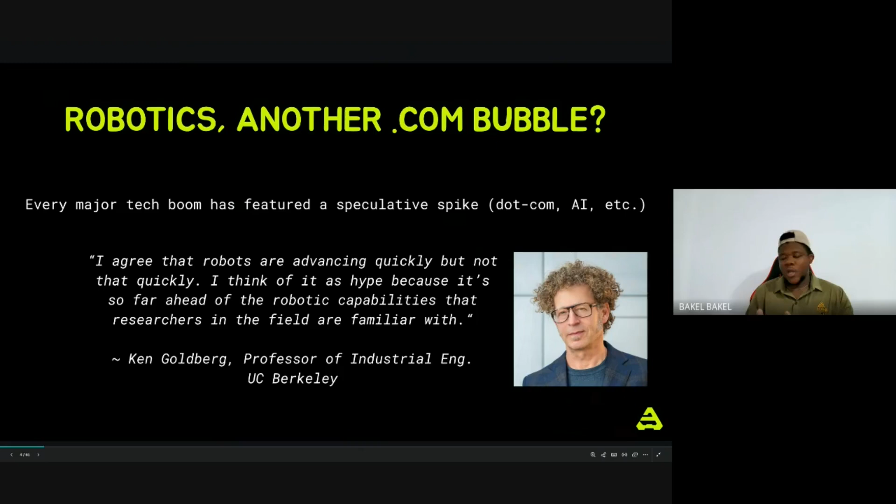If truly this is a dot-com bubble, and why we feel it is not, or it is. Now, the first thing we need to see is I've put together some reputable sources. This is a professor from UC Berkeley, and he is saying that he feels robotics is advancing, but not as quickly as people think it is advancing. So it's more like a hype, right? People are projecting a reality that doesn't exist in a field that hasn't gotten that far. Now, whether he is correct or not is something we are going to find out at the end of this lesson. So just try and follow the whole train of thought.

Now, before we start analyzing if robotics is or is not a dot-com bubble, let's first of all understand what robotics is. This is going to take a good amount of time, because you cannot really judge or say something about a particular field if you do not understand what that field is.

Now, there are some bodies that govern robotics. When I say govern, these are like supreme bodies, you can reference them, you can talk about them. If they do say something, there's some form of authority, both academic and industrial. One of those bodies is the IEEE Robotics and Automation Society. We all know IEEE, it's the international body for electrical and electronics engineering, and robotics sort of falls under that, so that's why we have a society for robotics in IEEE.

They said robotics is the science and technology of design, manufacture, and applications of robots. That definition is very simple, but sort of vague if you ask me, because then it begs the question, what is a robot? It's just like saying cooking is the act of cooking, or the act of being a cook. You still have a term that you have to define. Now, there's also an adapted definition of robotics, where it says it's an interdisciplinary branch, because it combines mechanical, electrical, computer science, and a whole other branches. We'll also look at that. At the end of the day, it's aimed for design, construction, operation, and use of robots. So again, we are falling back to the word robots.

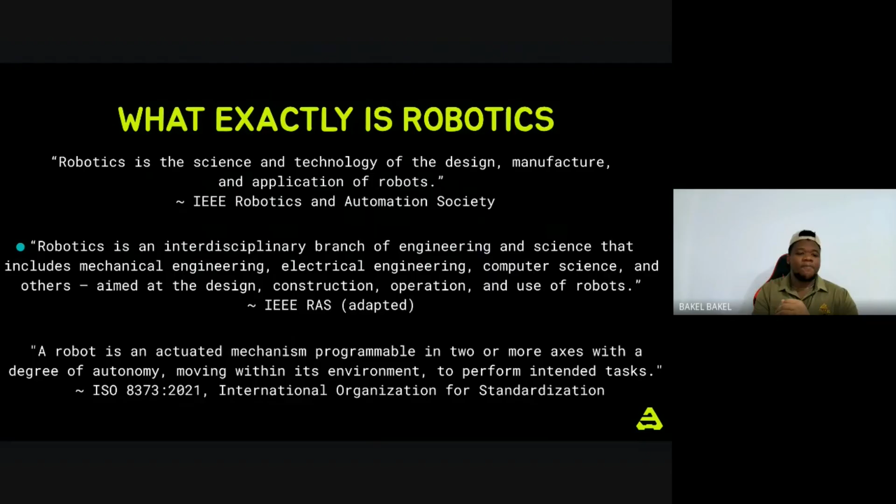Okay, so now let's kind of go away from technicalities and relate it to real life, right? So if you are doing robotics, basically you are building a system that should be able to sense the world. It should be able to make a decision, it should be able to now act physically because of that decision, and then work under uncertainty.

I'll give you an example with autonomous vehicles like Tesla, Waymo. At least people know there are cars that drive themselves, self-driving cars. So let's say a self-driving car is moving on a road, and it has gotten to a point where it needs to take left or right. The road is a T-junction, it terminates, there's left and there's right. And on the right, there's a barricade, so it cannot pass there. But the map, Google Map, might not see that barricade, right? So it says there's a road there.

Now, a robot is not just following an inbuilt map when it moves autonomously. It senses the world. So you, as a human being, you can see that barricade. The robot can also see it. The robot doesn't have eyes, but there are sensors that we use for that. I'm not going to go deep into that because that's another topic on its own. But on the surface, it can see that barricade.

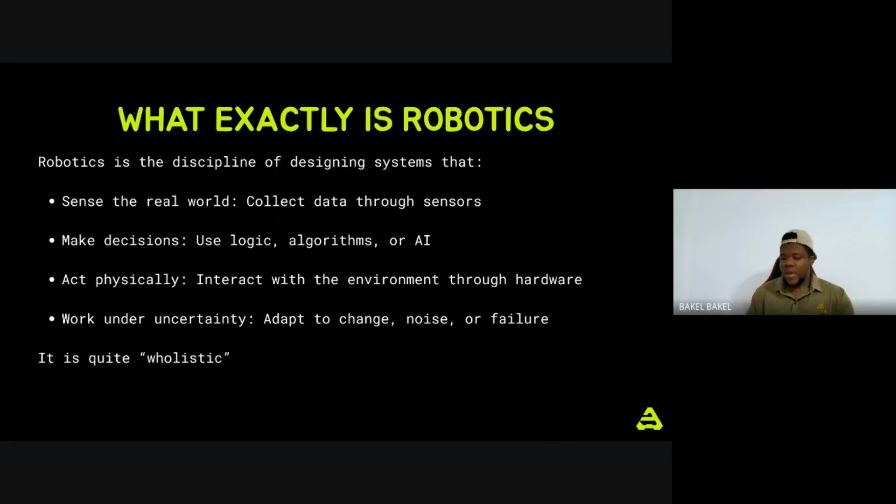But at least understand the idea of a robot using an autonomous vehicle because that's the most popular form of robots. Now that's what a robot is. And robotics is the act of building all of those things, bringing it all together and making it function as one. So it's a holistic field.

So there is another video where I actually talked about what a robot is, what makes up a robot in great detail. And the link, I'll also provide on this slide so you can go through it. This was... okay, so I was talking about what makes up a robot. And I was saying there is a dedicated video, a dedicated class that we had especially for this particular topic. So we're just going to run over it because it's a really, really lengthy topic.

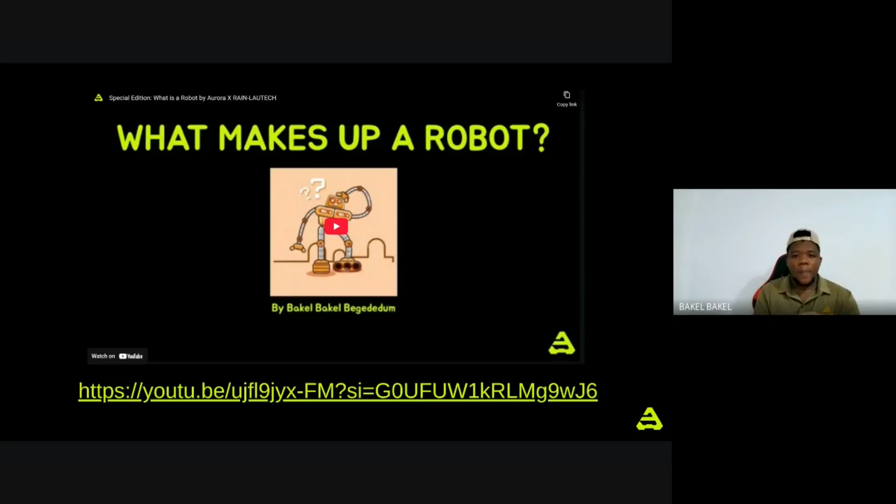So basically, a robot is made up of roughly 7 general parts, right? It's general because not all robots have these, but most of them, you can see on the screen. So we talk of the structure, we talk of actuators, we talk of sensors, control systems, power source, end effectors, and communication.

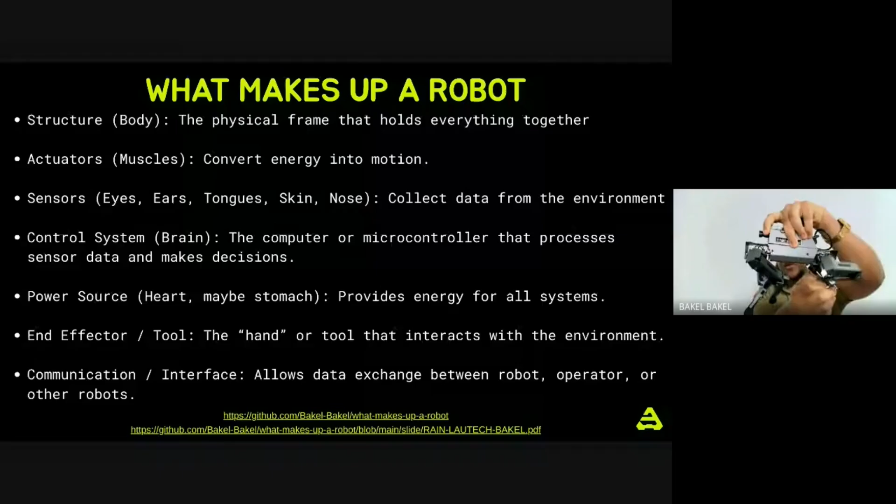So the structure basically is the overall body of the robot. Just for illustration, I will also bring something like this. If you see something like this, you can tell from the structure that, okay, this looks like a dog basically. So you can tell from the structure that this should be something like a robot dog. And in contrast to something like this, where you can easily tell that, okay, this is an autonomous vehicle or a robot car. So that's just the structure.

It's the body. Now, actuators is the muscle. It's how they move. And they all have different ways of moving. For a car, if it's an electric car, you'll be thinking of motors, or maybe mechanical, it's the engine. But if you are talking of, say, a quadruped, then it's those 4 legs. But those 4 legs are usually controlled by 12 motors, thereabouts. But at least you know what the actuators should be like.

And then sensors. Remember when I said the autonomous vehicle can see the barricade in my earlier example? Yes, it can see the barricade using sensors. It doesn't have an eye, but then there are things like LiDAR, there are things like cameras, there are depth sensors. These are different ways it can sense the environment.

Then control system is the brain. When we said, okay, after sensing, it needs to make a decision, this is where it actually makes that decision in the brain. It could be a microcontroller, it could be a microprocessor. Those details are things that we can keep for now.

Now, the power source - there are some robots that run directly on electricity, you just plug them in, and then some do have batteries. In any case, there must be something to power these components. That's why it's the power source.

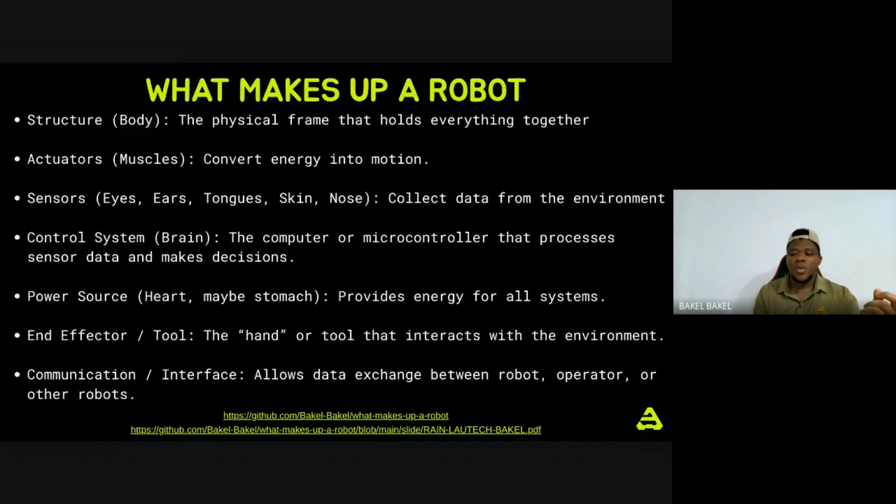We're going to look at the branches of robotics. Now, this can also be said as applications, but it's a very long list, and the list only keeps getting longer because people are finding new applications for robotics.

We have industrial. Industrial is one of the earliest, and till now, it's one of the greatest applications for robotics, where we're talking about car assembly. You see robots doing car assembly and general manufacturing jobs. We also have service robotics, like Roomba, vacuums that clean themselves in the house. You just turn it on and it cleans your whole house for you.

Those are service robotics. There's medical logistics, space robotics. We talk of the Mars rover, one of the earliest space robots known to man. We have defense and security.

Ahmed, please can you mute your speaker? Your mic rather. 5:35. Yeah, okay, I can do it myself actually. Okay.

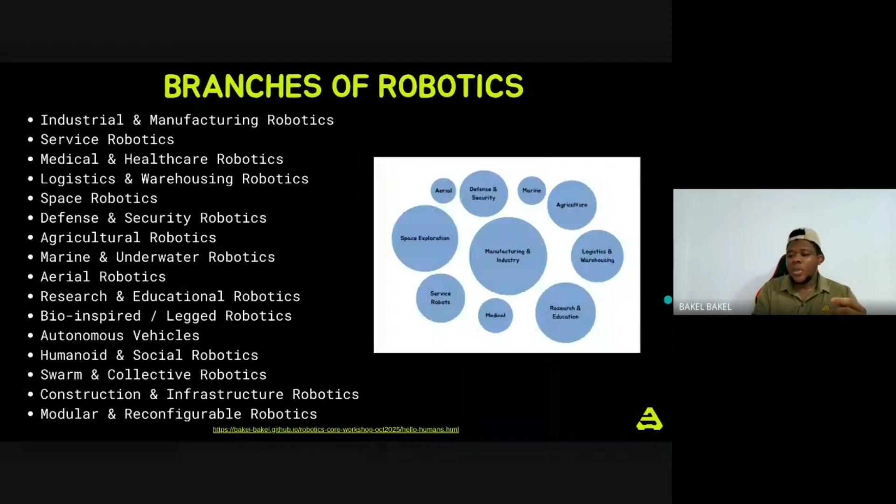Okay, so these are the fields that make up robotics. Remember when we defined robotics, I said it's an interdisciplinary course, right? So one day you might be solving some complex form of mathematics, another day you are doing control engineering for a PID, another day you are thinking of integrating artificial intelligence, and somewhere, somehow, you're also working on the mechatronics part of robotics. So all these particular fields make up robotics.

It's not as if you must know every one of them. We more like pick a thing or two from every single field, and then we squash it up together and make it robotics. So that's how it is. And there are some times where you might not even touch a field at all, depending on what branch of robotics you are working on. It's actually like that.

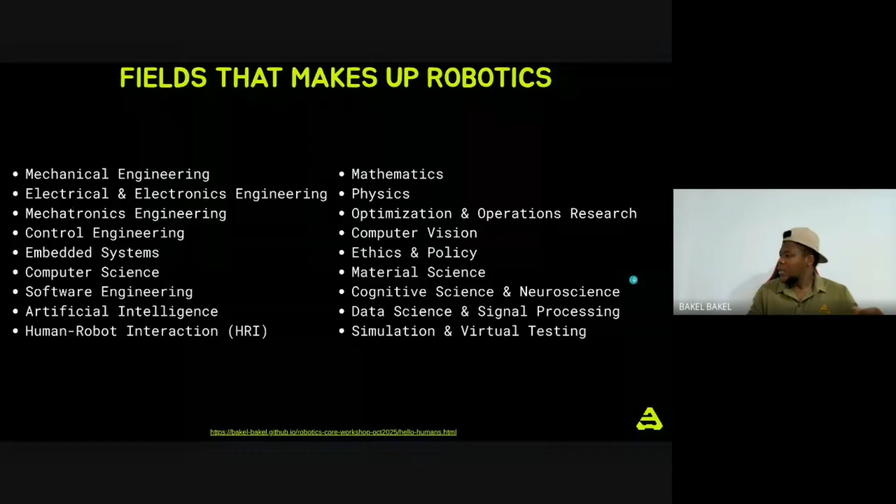Now we have fields that look like robotics. That's one of the things I wanted to clarify far more than the branches of robotics or whatever. Fields that look like robotics: automation, embedded systems, mechatronics, AI. It's a very strong confusion, and I want to clarify that with personal experiences too.

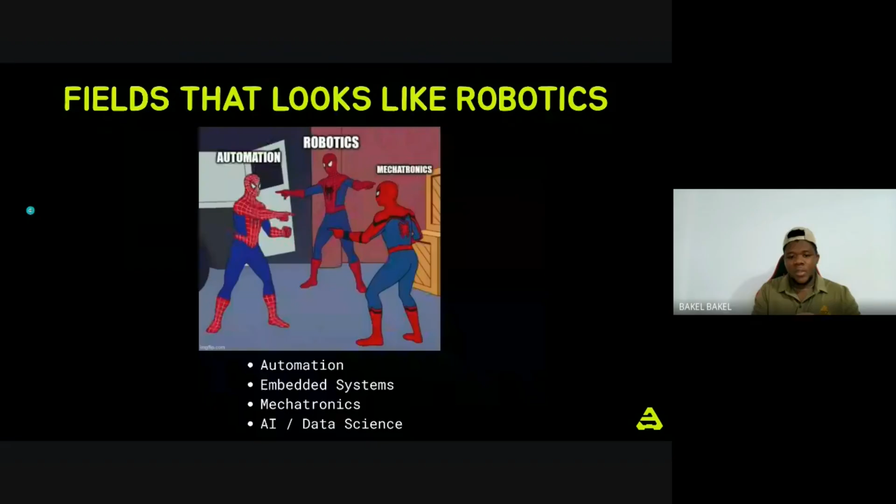The first one we'll look at is mechatronics. While some people believe mechatronics is a part of robotics, it's actually the other way around. So let me come again, just talking about fields that look like robotics.

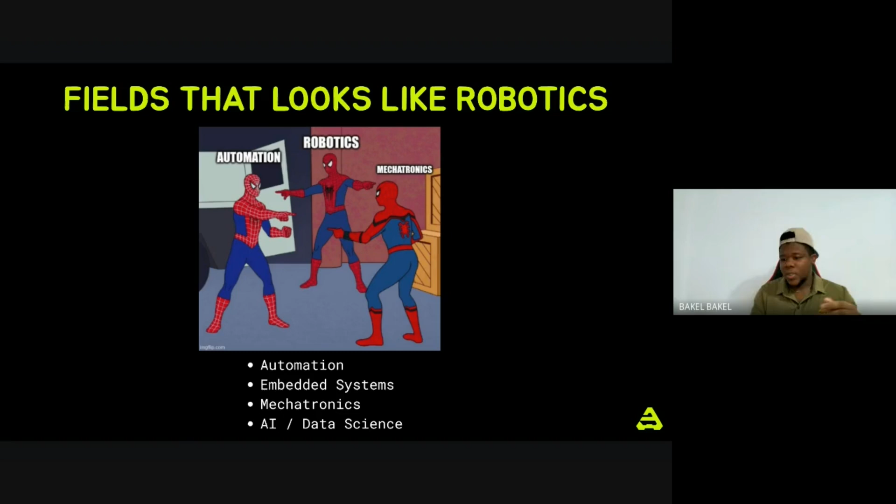These are some fields that a lot of people confuse with robotics: automation, embedded systems, mechatronics. Mechatronics is the father, basically. There are people who say robotics is... look, when a field is being hyped, a lot of uneducated people talk about it and it becomes irritating. It's just like AI people - we see a lot of people hyping AI, but only a very few know what AI is, what its capacity and capabilities are. You don't put mechatronics inside robotics; robotics is actually inside mechatronics. Mechatronics is a broader field that combines mechanical, electronics, computer science, and control to create intelligent systems.

But what is the difference between mechatronics and robotics? In mechatronics, your systems don't have to actuate - it's not necessary. For robotics, all robotic systems are mechatronic systems, but not all mechatronic systems are robotic systems. So there's a very clear distinction there. I took mechatronics courses, and some of them had nothing to do with robotics. Now that I work in the field, I can say yes, there is actually a clear distinction between these two things.

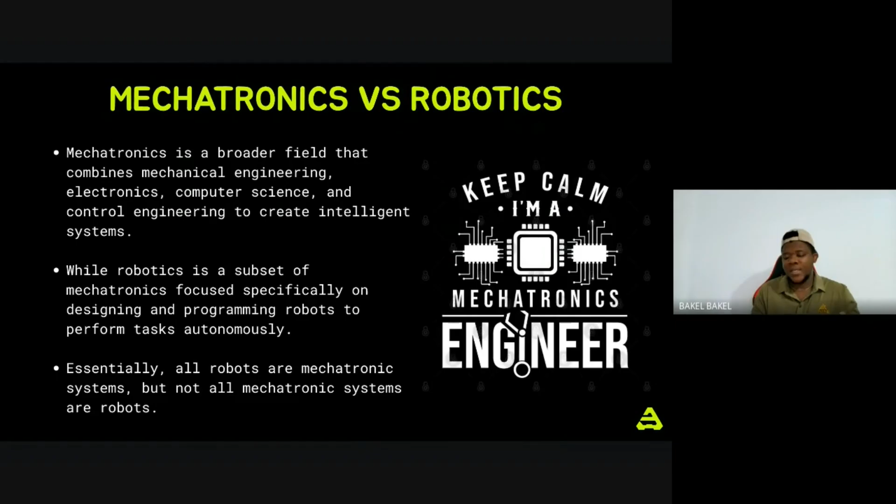Now we look at AI and robotics. First, it's obvious that the majority of AI resides in software. What I mean is that AI per se is a computer science endeavor bent on learning data, recognizing patterns, and making decisions all within software. None of this has to do with sensing the environment or actuating - it's basically the part that does the thinking, if you look at it critically. So will I say robotics is inside AI, or AI inside robotics? No, these are completely different sets of knowledge that simply intersect.

So it's more like AI union robotics, something like that. Not all robotic systems must have AI in them, but robotic systems that do have AI make very smart decisions, and it helps with perception and planning. I could go into more complicated things, but let's understand the basics, the idea.

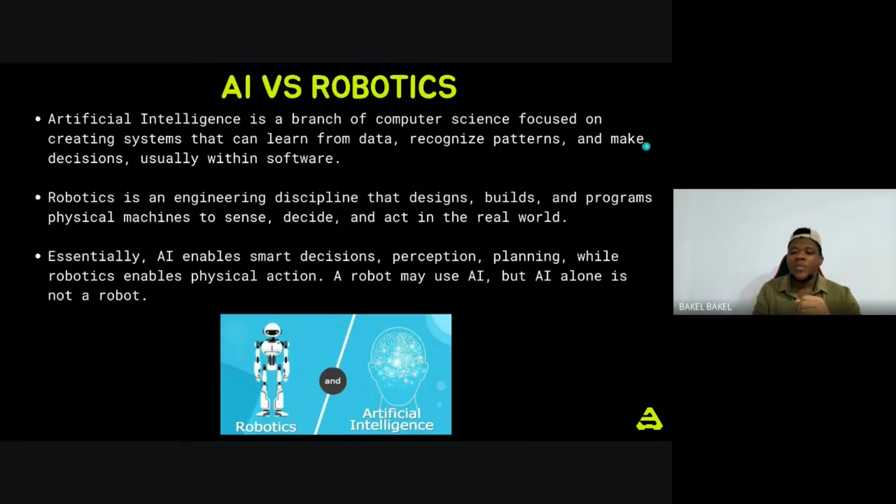Now we look at automation. Automation is another thing that confuses people with robotics. Why? Because if you look at it from the outside, automation looks like robotics. Take for example a factory line - you have robots there, and what they are doing is assembling a car. Let's create this little situation.

The car door comes in, and say the height of the door is 3 meters, and there's a weld that should be at the top at 3 meters. One machine welds at 3 meters, then moves to the next one. Let's use that example. In automation, they've defined these rules: once the car door comes, go straight up to 3 meters and weld.

What happens if you bring a car door of 1 meter? It's still going to go up to 3 meters where there is no car door and attempt to weld the air. The problem is it's not sensing its environment, but it's extremely precise with the instructions given. So it looks as if it's a robot, but all this is just automation. The environments they put automated bodies in are so controlled that they have to perform properly.

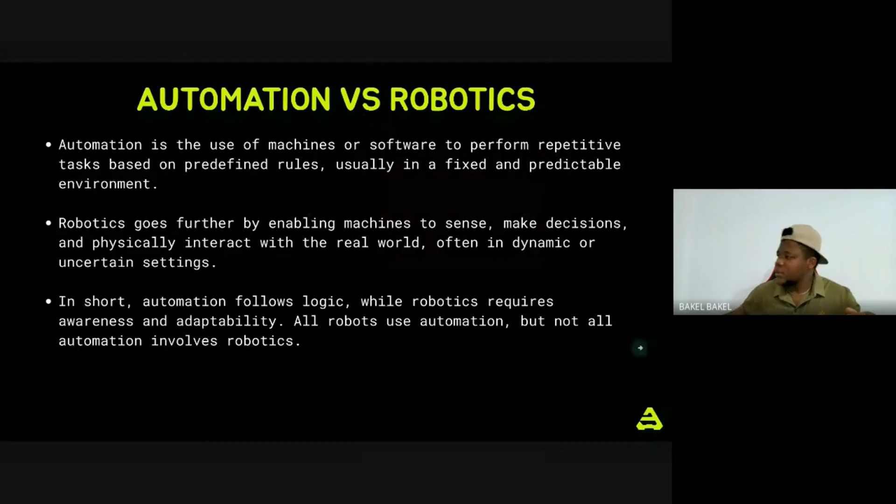And for embedded systems, robotics will not exist without embedded systems. That's one. And yes, the class is recorded. I'm going to share a very funny story.

Now, I was in Netherlands, right? I traveled to Netherlands. I went for this professional training, and I was narrating my embedded system story. So prior to that program, prior to that certificate, prior to that training, on my CV, I had a place robotics engineer, and then I have another place I wrote embedded.

So I've always thought, okay, yeah, I'm robotics and I'm embedded. Why? Because I know how to use microcontrollers, I know how to use microprocessors, I know how to use a lot of tools. So somewhere in my head, I'm thinking, okay, yeah, that's enough to be an embedded system engineer. So I have robotics and embedded system engineer on my CV.

So I actually go to this place, these competition events in Netherlands. There were guys that were doing robotics and there were guys that were doing embedded systems. And I went to the embedded system guys and we started talking. And when we started talking, I started hearing things I've never heard before in my life.

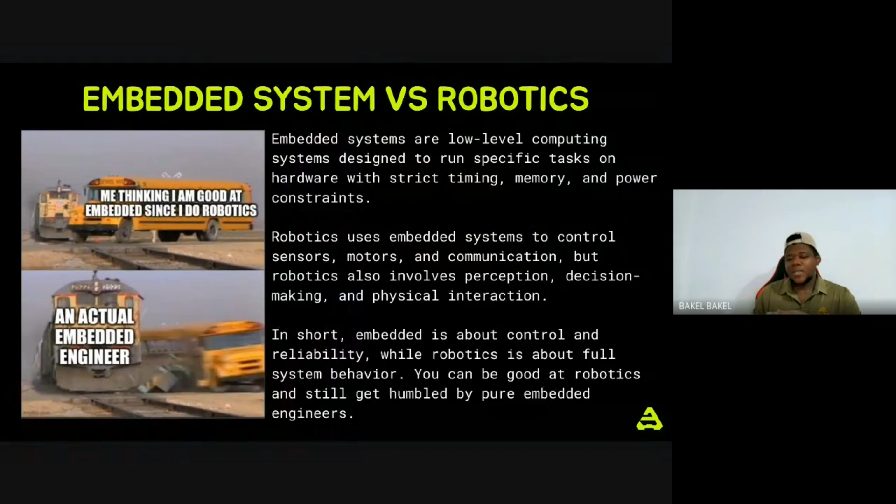Now let's look at robotics from my point of view. And when I mean my point of view, I want to make it a bit personal. My journey in robotics is a bit strange. Some people think it's impossible, but then again, I share it, and it's on my LinkedIn, if you've followed me for a very long time now.

I started as a naval architect, and that's where my major training and my experience is, right? Oh, you're just joining, okay, congrats. So my undergraduate was in naval architecture, my two masters were naval architecture. So basically that's what I have been doing.

But then I switched to robotics in November 2024. And the way that happened was a bit funny, because I've always known about robotics, but I had never really done anything about it. But then there was an elective course in my master's, my second master's in naval architecture, where robotics was an option. So I was like, okay, let me just try it. And I ended up turning that elective course into a career, because it was not enough to make a career though, but you research and add other things to it.

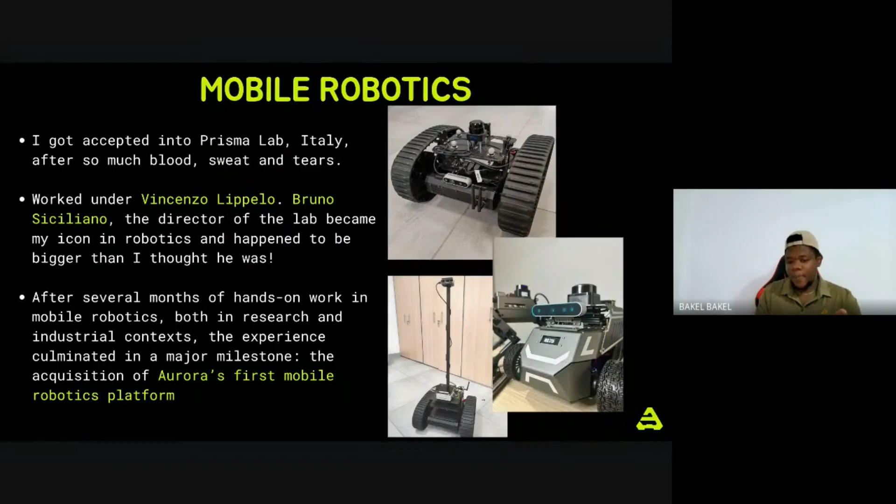Again, let's follow the story. Now I started doing underwater robotics. What happened was in Italy, I worked there for like 3 months, and then I moved to Spain.

And while I was in Spain, anywhere I get to, I look for the closest robotics association or the closest robotic gathering. The one in Spain was underwater robotics, not mobile robotics like I knew in Italy. So again, I had to start learning things again. I was like, it's robotics, robotics is robotics, so anything robotics - that's basically what I came up with.

And then I played around with underwater robotics for 5 months. At this time in Spain, I was still doing my master's in naval architecture.

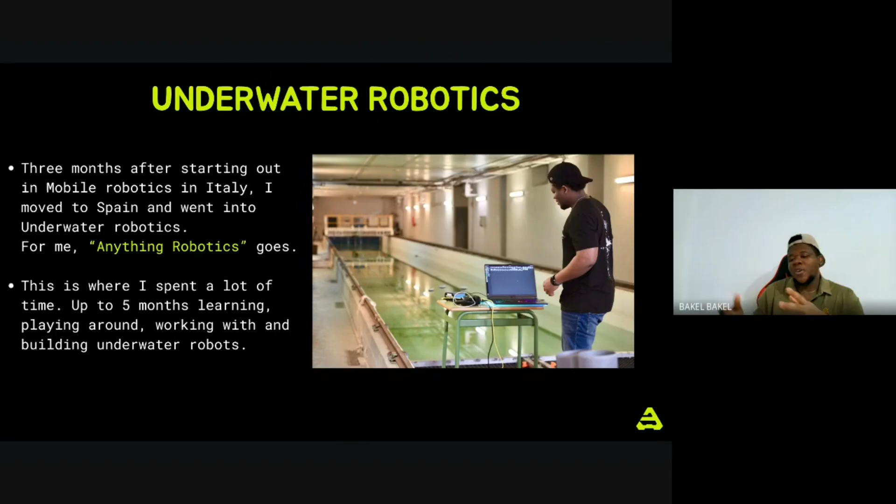But the professors in Spain were like, okay, this kid is actually good. So they started inviting me to come and lecture other master's students in robotics. Then people mistook me for a postdoc in robotics because I was always in the robotics lab and always working. But I was just there for fun. So this is me at this point.

They were inviting me for trainings, and I started training a lot of people. I wasn't being paid for it actually because I'm just doing it for fun. So that's how it all started.

And then I got some PhD offers, when you're putting yourself out there and just exposing yourself. So I started doing competitive robotics.

But tomorrow we are going to talk more about competitive robotics because we have a guest speaker, Saka, who actually does competitive robotics a lot.

But from my own end, I went for this European Institute of Technology competition where my team actually won. It was actually one of the biggest points in my career, because it was a flex - we got teams from the US and everything. So it was a big flex.

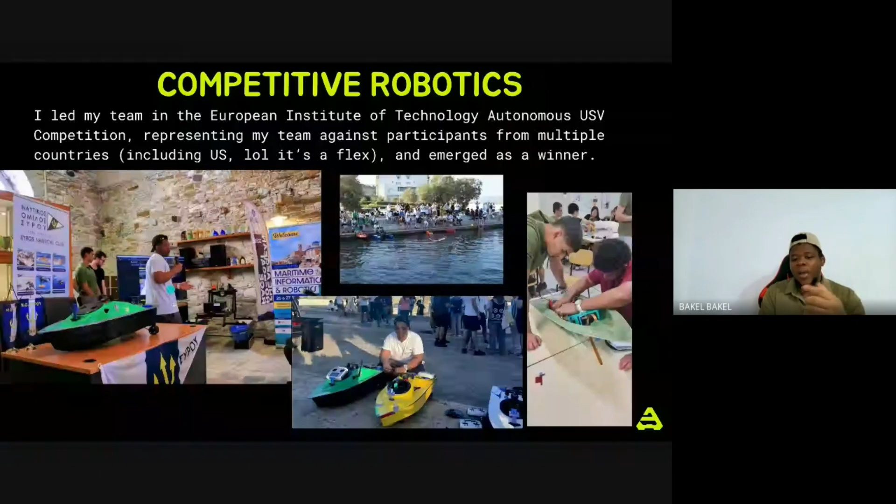But it was a funny situation, because immediately after this competition I went for another competition where I couldn't even finish the task. So it was a very funny week for me - one moment you're high, and then another moment you're being reminded that you should be humble. But I actually enjoyed the game. I represented pretty well, and it was a nice experience for me overall.

Okay, now aerial robotics. Most of my experience from aerial robotics is from Prague, Czech Republic. I'm someone that travels a lot, I enjoy traveling, so I'm going to be calling different countries, and I travel most times.

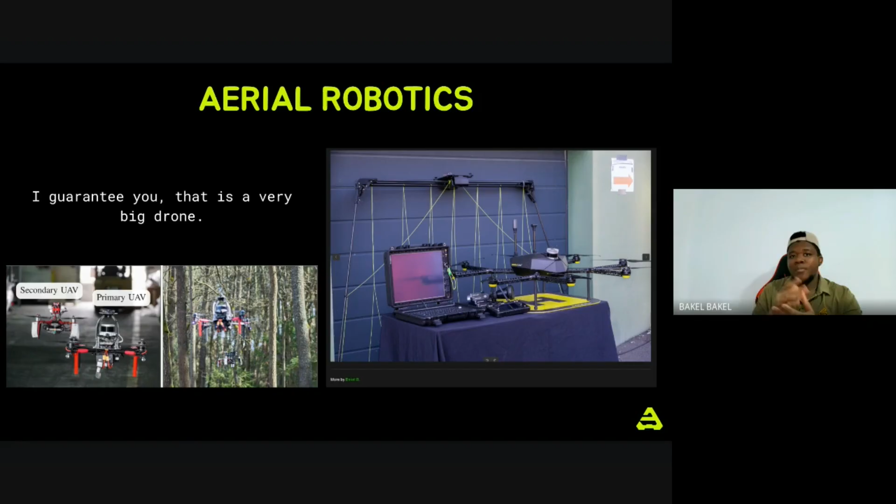When I travel, I look for the closest robotics association, and for me I just walk straight in - I'm like, okay, I want to do robotics. So I worked on aerial robotics. I saw really big drones - most times we deal with drones that are like palm size, but I saw really, really big drones, with lidar and a lot of things. They were investing millions of euros in this particular field.

Then bio-inspired robotics - for those of us who have probably heard of the Unitree, those walking dogs. Yeah, I had a smaller version, because why not? But the big ones are really, really expensive. This was in Greece.

I went for this particular program, we did this training, it was nice. I played with different classes of robots.

Now there's this clever thing that some people are doing. When you have a dog, what they're very, very good at doing is smelling or sniffing things. So they are trying to use these dogs to create an artificial nose called an e-nose, and then it just kinds of sniffs things around. It's complicated, but it's ambitious.

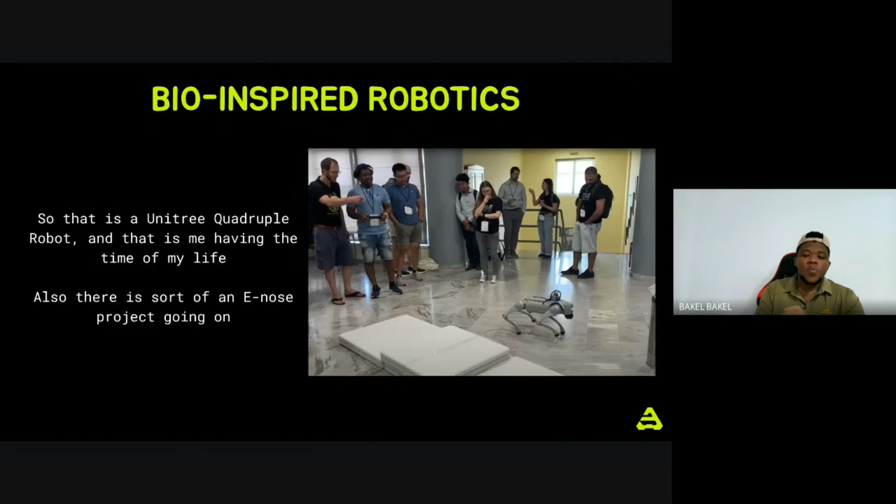Now, industrial or field robotics.

I started my whole professional robotics career not so long ago, and I've had the opportunity to work on a lot of projects, including energy plant inspections, robotics for construction, and more. Companies spend millions of dollars on robotics - I read this in the news, I see it, and in a week I can get 2 to 3 job offers. Even Chevron and Shell invested quite a lot of money late last year to acquire robots and people to create and program these robots. It's actually a big thing for us in the field.

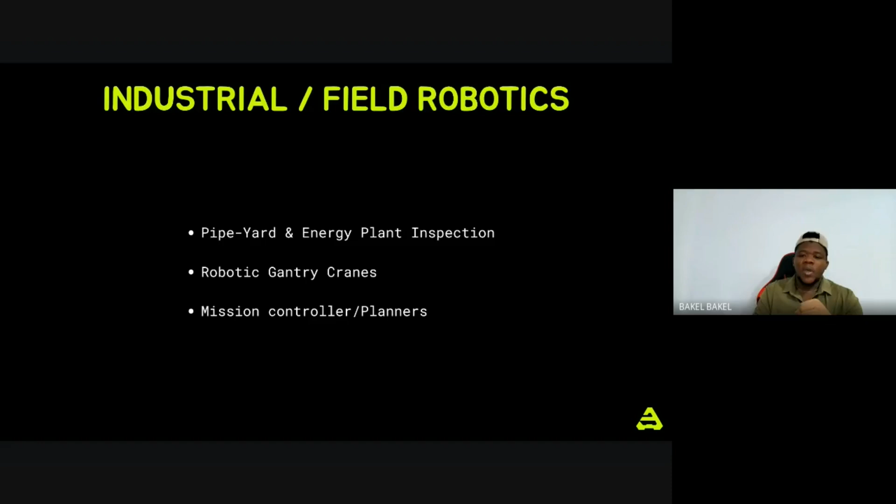Multi-robot systems are systems where you have many robots, but you don't control each one individually - you control all of them as though you control one. You've probably seen those drone shows where many drones fly together, but the problem is those drones are centralized - there's a common control station controlling all of them. It's a nice show, but if you change the terrain, it becomes a different story entirely. What we try to do is replicate how birds fly in flocks - they adapt to the environment and move around, nobody controls everything, but each bird knows the location of the next one and they move together.

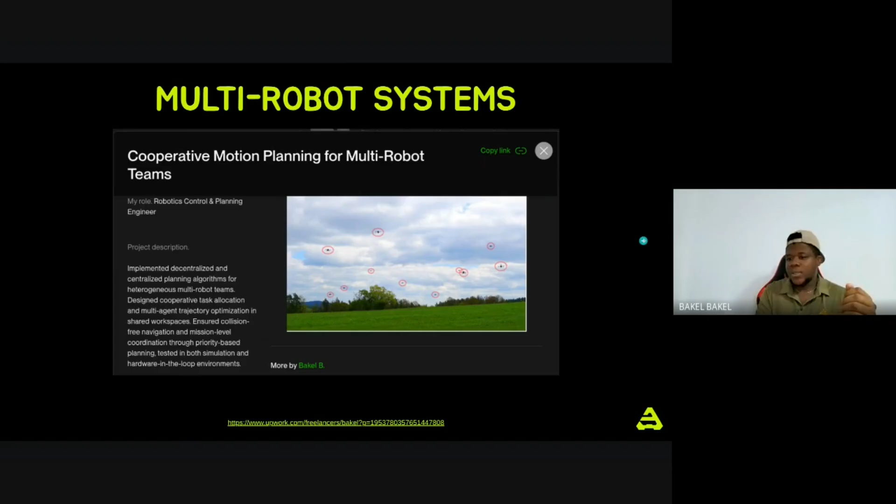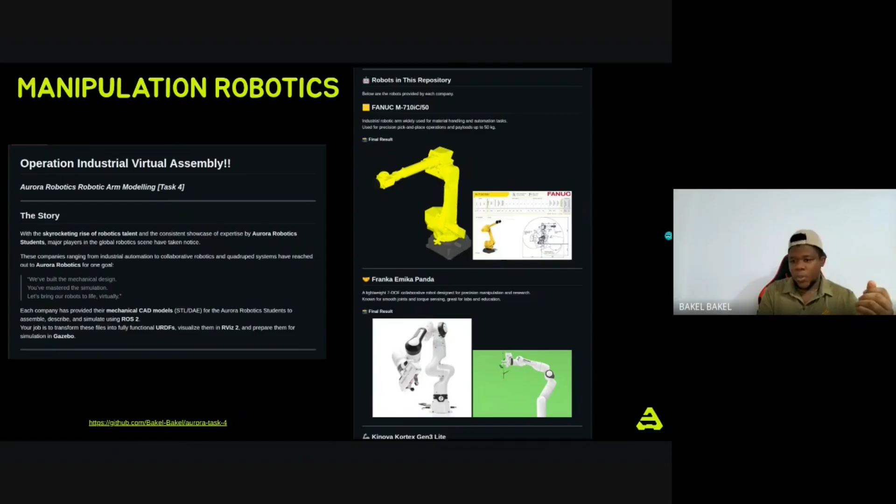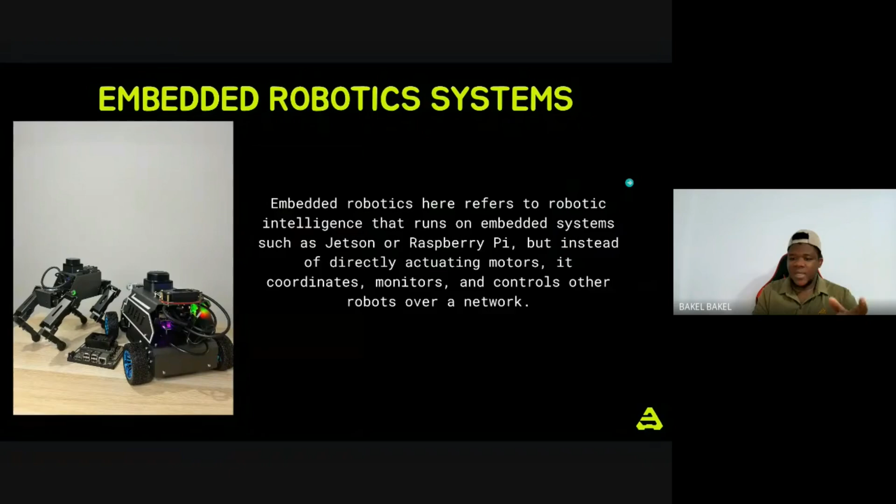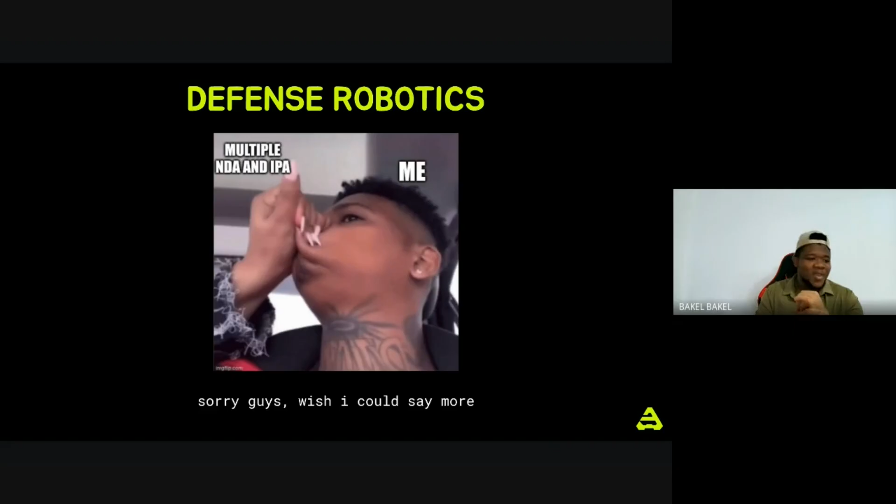Because people would always look for easier ways or machines that will do things for them. Now, the report is the amount of robots installed alone, not the cost of maintaining them. We're talking about the value of robots installed being about $16 billion. And that's an extreme, very large number.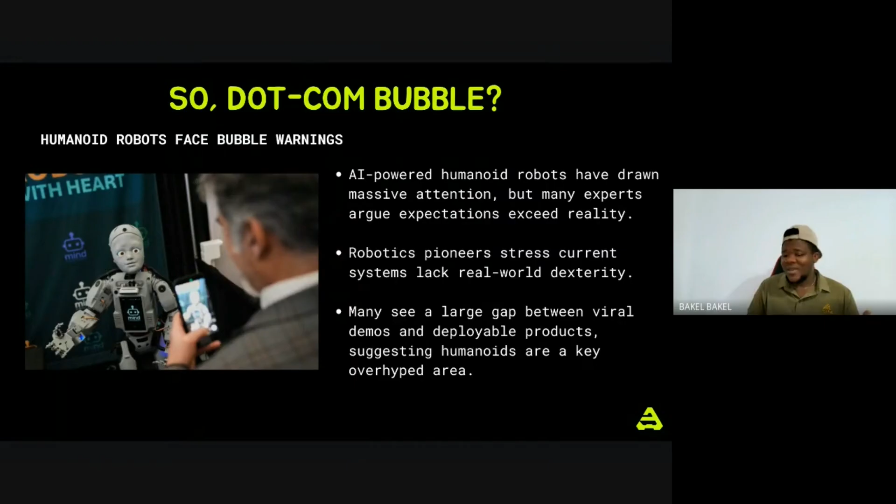And when Leonardo da Vinci was doing a lot of innovation, people saw him like a madman. And then Vincent van Gogh himself, his paintings, people looked at him and thought he's a madman. But later on, it all started to make sense. So probably humanoid robotics now doesn't really make much sense, but the prospects in it would actually make sense.

Particularly in this job, I was to train humanoid robots—there's a video of this on LinkedIn—to communicate. Remember, we put humanoid robots and social robots together. And the idea was, since there's humanoid robots, let's make these humanoid robots able to talk to kids that have autism, to interact with them and all of that. So that was the idea here, and I got that done. You can see it's sort of like a brain, but let's not go too technical.

So humanoid robots is one of the reasons why people feel there is going to be a burst, because if you check, most of the companies that go bankrupt are humanoid robots. Somebody actually forecasted that only 20 companies will end up comfortably producing humanoid robots by 2028. In the US alone, there are far more than 20. In China, there are so many that the Chinese government had to regulate how many can operate—you can't just open a humanoid robotics company in China. That's how much they are.

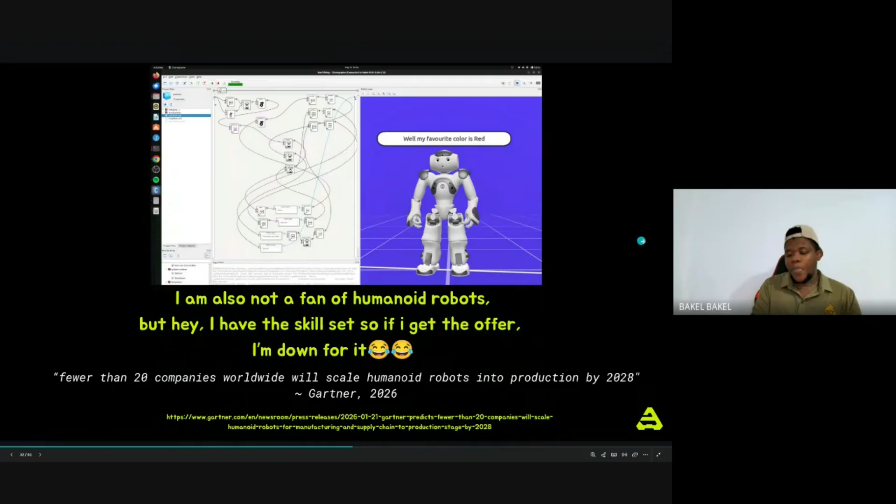Another question that we encounter is: is it taking more jobs or is it creating more jobs? In my opinion, it creates more jobs.

But it also takes a lot of jobs, right? Let's assume, a very good application I think was in 2023, where Amazon laid off thousands of staff and replaced them with robots. Now, the amount of staff laid off versus the amount of robotics engineers brought in to replace them, you can't compare it. There are fewer robotics engineers, but I'm not a fan of evolution, but it's sort of like evolution.

Darwin, right? The strongest should survive. People that are able to notice change and react to it are the only people that deserve to survive. I'm a fan of that.

So probably if you were someone selling horses, and then the car comes up, you'd get pissed because now people will start driving cars and nobody will buy your horse. But the world does not owe you anything for you to be stagnant. So what you do is start looking for a way to sell cars instead, and change. That's how I look at it. So yeah, it creates more jobs, you just need to switch into whatever new trend you deem fit.